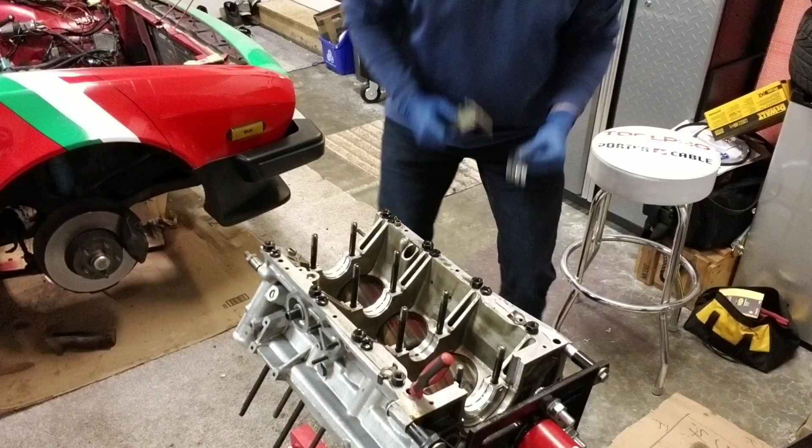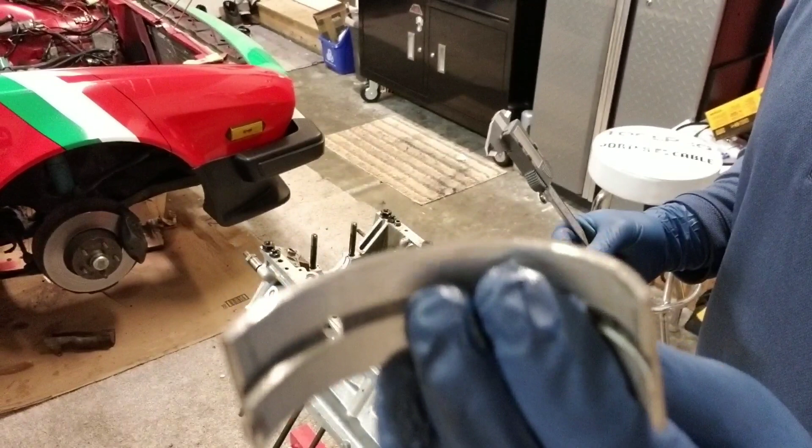So I finally received these from England today - my new main bearings, and I also got the new crank bearings. Tonight we're just going to drop the crank in, torque it down, and check it.

Here's the old bearing, and this is the new one. The way you can tell which bearings you need is by looking at your crankshaft - you'll have either red paint or blue paint on it. Mine is red, which means it was standard bearings, not undersized or oversized. They fell within a specific measurement when the factory put the engine together, so standard bearings are what I ordered.

What you want to do when you get your new bearings is get yourself a micrometer, digital or analog, and measure your old bearing against the new bearing. They should be within a couple thou of one another. These check out - I've checked all 8 of the main crankshaft bearings and they all check out, all within spec. So now I'm going to show you how to swap these out, drop in your crankshaft, and check everything.

So now we're going to bring over the crankshaft and drop it in. I'm looking at the camera and I'm out of focus - why is it out of focus? Come on, you can do it. There you go, all right.

Okay, let's bring the crank over and drop it in. You want to make sure, because this thing weighs about 45 to 50 pounds, when you drop it in, line up your bearings and journals and go straight down - try not to ricochet it and bounce it around off of everything.

And the back one will be the most tricky because that's where your thrust washers are. It should all just drop in like that. So once you're sure this is nice and seated...

If all is well and right in the world, this should easily spin. So just grab a hold of the front and give it a spin. Look at that, that's a good sign. I don't feel any hang-ups, I don't feel it dragging, I don't feel anything that feels like it's scratching or dragging. So that's a good sign. You can look down, look at the crank, look at how the oil's distributing, make sure it's distributing evenly. So that is our first good sign.

So that's great, the crank is now back in the engine. So what you're going to want to do now is install those caps on your mains.

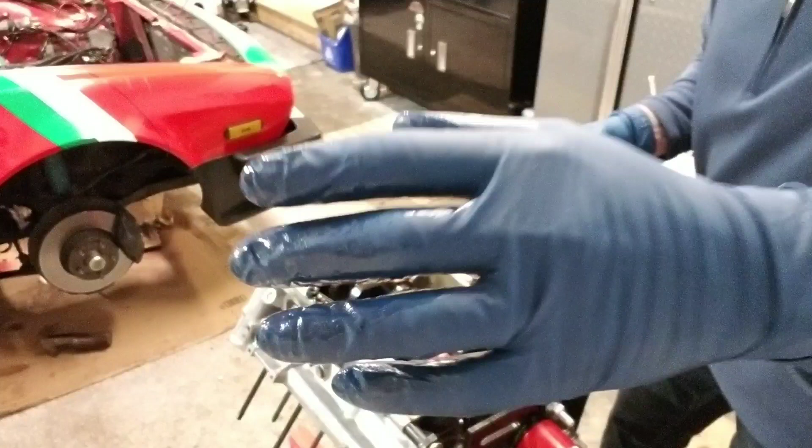There we go. But for the sake of this right now, all we're going to do is install the caps and torque them down, because all we're checking for is to make sure the crank moves freely. It's not hung up, it's not pinching. Make sure the bearings are not oversized, because if anything's going to go wrong, you want to find out before you put the engine all back together. So let's put these bearings in and drop these caps into place.

So I'm going to bring these guys over, and these as well. So here's all the new bearings, 4 on the bottom, 4 on top. And it does not matter when they're brand new what is front and what goes in the rear.

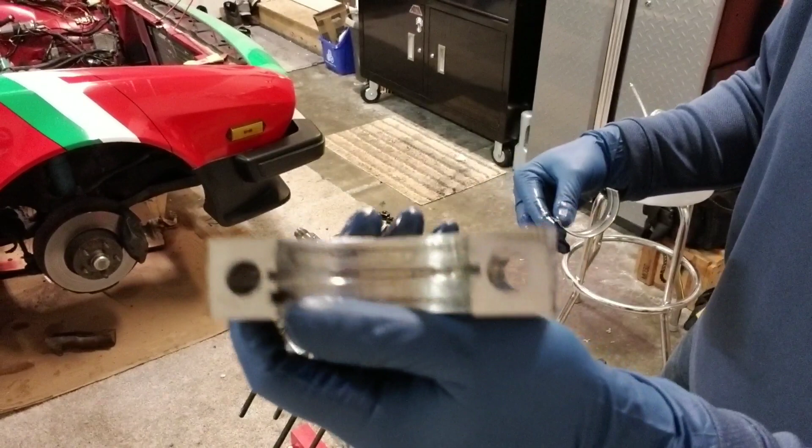So, again, just oil the surface here, spread that around a little bit, do the same, and again it's the same thing. So just like down on the block, on the crank, or on these main caps, you've got this notch that meets up with this notch right there. So all you want to do, and this is just the same as on the block as it is on the cap here, you're just going to line that up like that, and then just press, and that's it. That's all there is to that.

It is crazy simple. So then all you want to do is a little bit of oil. It could be a lot, it could be a little, doesn't really matter. You don't want to go crazy, of course, but then going to drop this into place. So this is the forward cap, we're going to drop that on, okay? And just repeat from back to front, front to back, it doesn't really matter. And again, just line up the little notch and press down into place. And that is all there is to that.

Same thing, lightly, just a light coating of oil. Or if you don't want to do it on the bearing itself, you could do it down here on the actual crankshaft journal itself. So we'll drop this one into place. And you want to make sure they fully seat down. There's a little groove that they sit down in and they'll fully seat. You just want to make sure that happens so you don't torque them down crooked and cause yourself any kind of problems, because that would just be all bad.

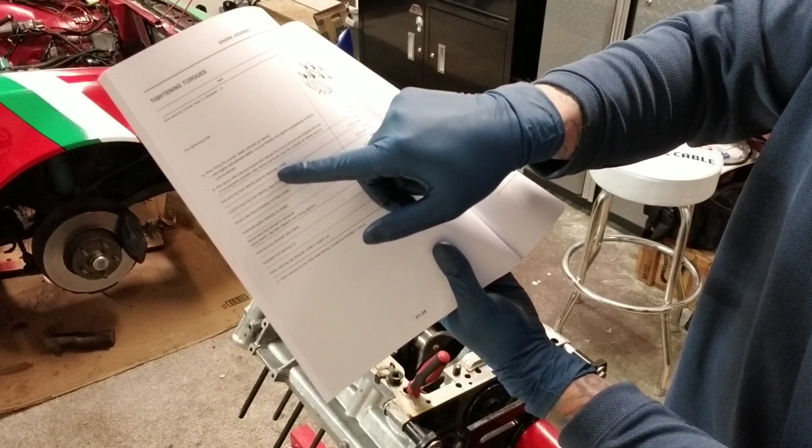So we are going to torque these down. We've got our handy dandy Alfa Romeo workshop manual, doing our nuts securing the main bearing caps to the crankcase. These are oiled, which we've already done. So we've got units of measure - Newton meters, kilograms, and foot-pounds.

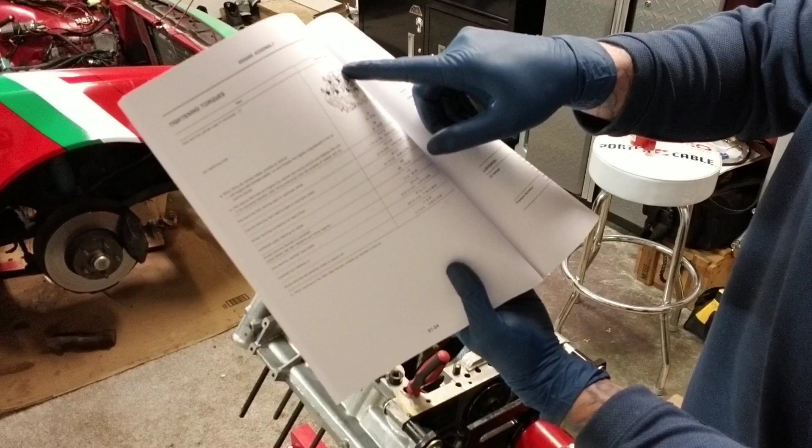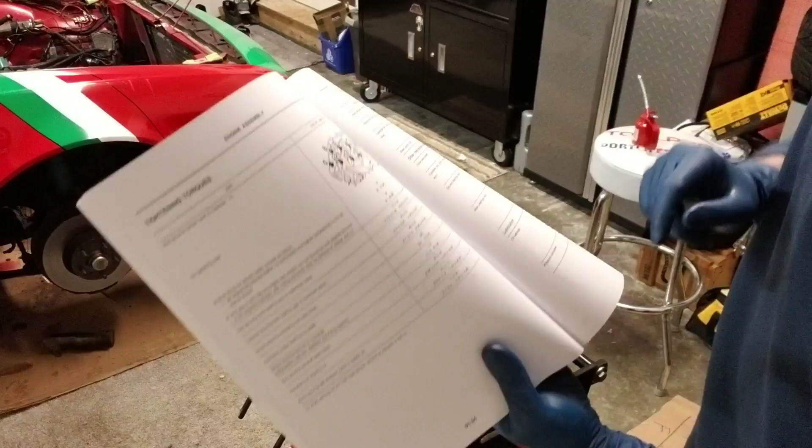Of course, foot-pounds makes the most sense to me because I'm American. So we are going to go between 56.5 and 57.5 foot-pounds. That's what we'll be aiming for, so we'll split the difference and call it 57 foot-pounds. That's what we'll shoot for. 57 is the number, so let's quickly get these down.

If I was better prepared I would have had all this set up for you guys, but I decided to turn the camera on at the last minute to make this video. If I remember correctly, these are 19 millimeter, if memory serves me. And it looks like I'm right - 19 millimeter is what we've got.

So we're just going to install these quickly with my impact. I'm not going to torque them down with this - it's just to get the nuts bottomed out. You're going to drop your washer on, then start your nut by fingering it on. We're just going to do that all the way around, get them started.

Now, it's a good idea to oil these nuts and washers. I did not wipe the oil off these when I took this apart - I just left them oiled, sitting in a little container. If you do happen to rinse off the oil, just re-oil them. If you have a spare coffee can or a little Tupperware container, steal one from the kitchen, and just soak them in some oil.

So now, before I do my final torquing, I'm going to give the crank another spin. Look at that - we're still good. Let me get this camera to focus. Come on, you can do it. Okay, so look at that, still good to go.

So now we're going to do our final torque setting. We're going to crank all of these down to the factory torque. And then hopefully, if we've done everything correctly up to this point, it'll still spin. So we're going to go.

There we go, there's the first one. There's the second one. Just keep going and go back every now and then to re-verify you're still on your torque setting. I don't know why I have to keep doing this - usually this will stay focused a lot better, but that's okay. You get the gist of what I'm doing.

Okay, run to this guy. Good, good, we'll go over here. Cool, come up to this front one. Okay, now we'll go back to this back one. Okay, and the last one up here.

And that's it. You just want to kind of look around, inspect, check everything you can. And listen - you want to listen, see if you can hear the sound of any kind of metal on metal, any kind of dragging. It'll stand out, you just use your ears, be quiet. Listen, feel. Go both directions.

Beautiful, beautiful, beautiful. Could not have had that go any smoother. So at this point too, give the crank a little bit of a push forward and backward, because you do not want to have too much - actually you don't want to have any forward and backward movement.

But this is purely just to make sure that, number one, my measurements were correct when I took my mic and checked these. And you can see a little bit here - there's some red paint there, there's some red paint there, red paint there. And what that indicates, now that I have my manual out, let me grab my rag. There it is, and I'll show you what I was talking about when I was talking about red and blue paint.

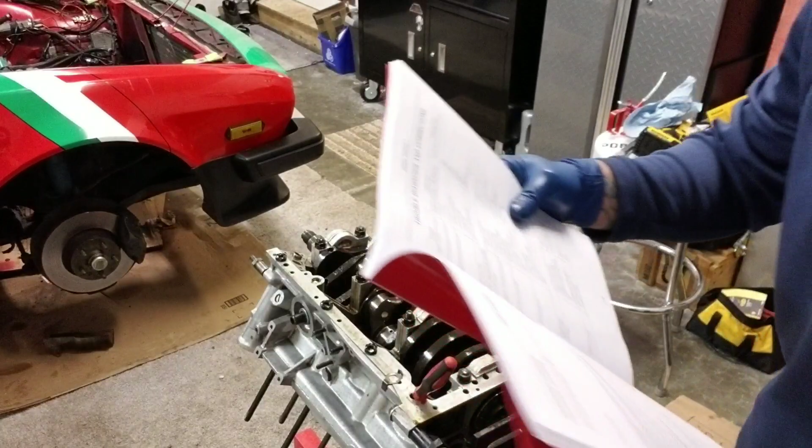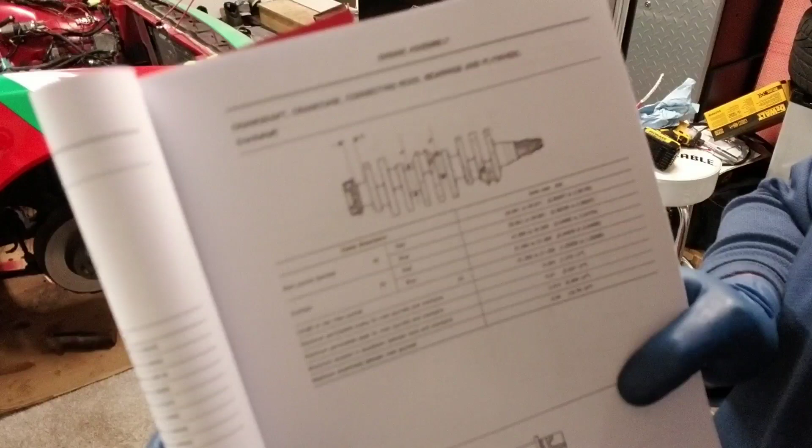So if you come into the book, let's see if I can find that page. Here we go, so you have engine assembly. Let me find the camshaft or the crankshaft, because that's what we're working on. Here we go, so here's your crankshaft. Let me get in good and close. Okay, so here's your crankshaft, rear, front.

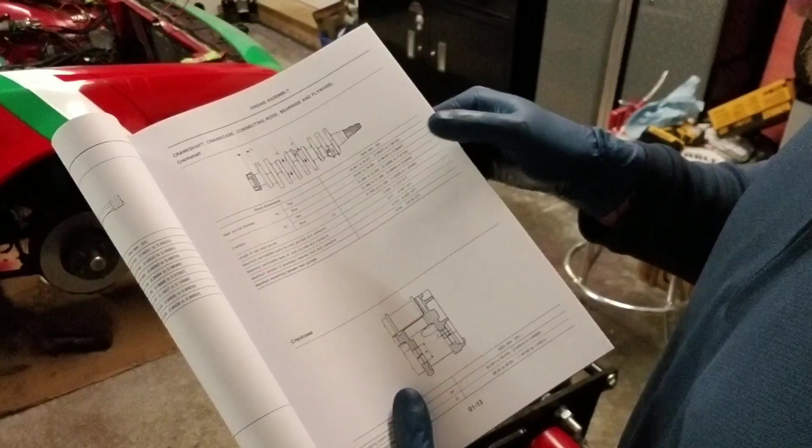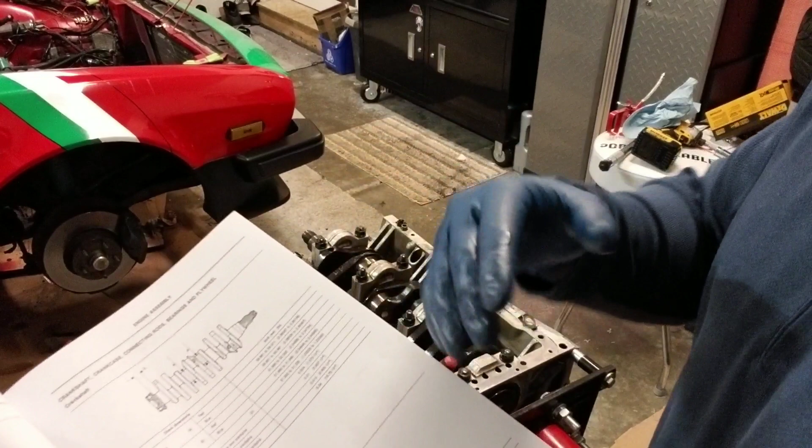So you have your main journal diameter, which is measurement A, your main journal diameter. Then you have measurement B. So they're talking here about red and blue - your crank will have either red paint or blue paint from the factory. Red paint indicating the certain measurements of these bearings, which will then indicate which bearings you will need when you do this job, if you decide to do this job. Hopefully over the 30 or 35 years, the paint has not been worn away or washed off because of all the oil. In this case, mine has not, so I'm guessing you'll probably be lucky and it'll be there as well. So you just want to look for either red or blue paint.

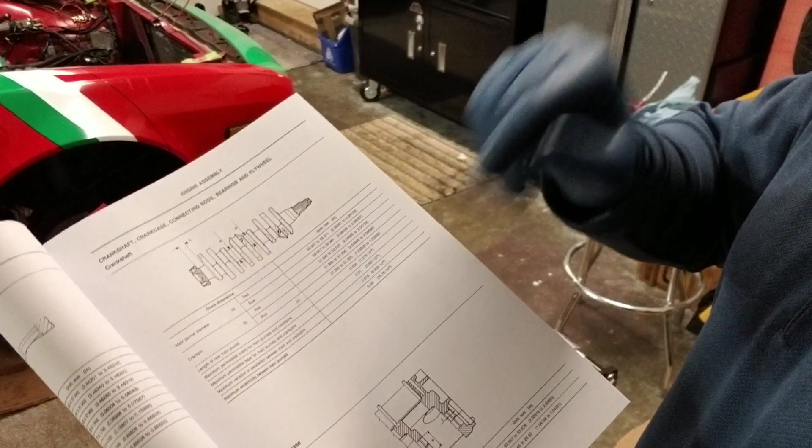And that will indicate to you which crank bearings you're going to need, as well as what connecting rod bearings you'll need. In this case, red indicates standard bearings. Now, when you go to order, just because I've gone through this, indicate whether you have red or blue paint.

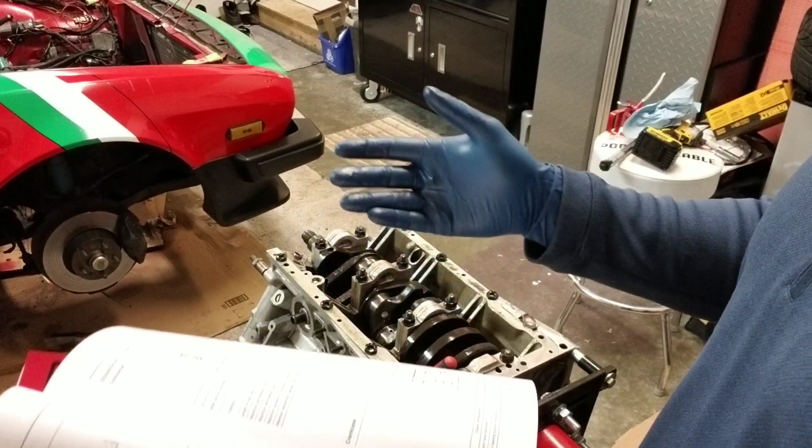Now, I'll tell you right now, I checked around in the United States. Nobody currently has both sets of both the connecting rod and the crankshaft bearings in stock together. I actually had to get these out of England. So the cost is the cost, it is what it is. You have to pay a little extra for shipping, but the cost of the parts themselves are pretty similar in pricing, whether you're paying in American dollars or pounds.

So when you are going to do this, indicate red or blue, and that'll just indicate which bearing sets you need. Now, when I say bearing sets, you're going to talk about standard, then you're going to have 0.010 over or 0.020 over. That would indicate an engine that's had some work done, or the factory machined it a little bit more than the other. But a lot of the times that would indicate, in most cases, that engine has been rebuilt at some point, and the bearings have to be oversized because they've taken some material off these crankshaft bearings.

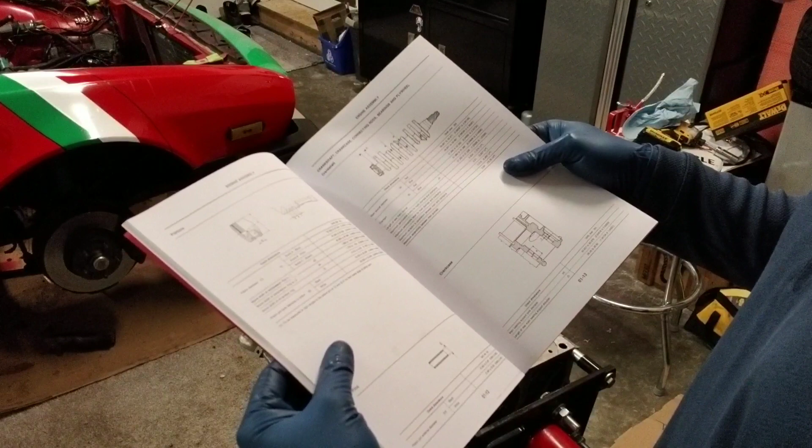But in this case, I had red on my crank, which indicated that I had standard. But you want to double check, because just because it says I have standard bearings doesn't mean that this engine at some point wasn't taken out, somebody gone through it and put in different bearings. In this case, everything checked out. So that's why it's important, before you start installing all that, is to mic it all out. Make sure the measurements are pretty dang close to each other, within a couple thousandths of an inch. And that'll tell you right away that you're good to go.

So there you go. So now we've checked this out. We've installed the crank, we've torqued down the main caps, we've checked it all. Now you could go a step further with this, and a lot of people would recommend it. I would recommend it as well.

And I might even go this far, because I am going to pull the caps off anyway, is get some Plastigauge. If you don't know what Plastigauge is, it kind of looks like a piece of plastic horsehair. You lay it down across the bearing, put your cap on, torque it down to factory spec, and then it'll kind of mush out. Then you remove the cap again, and on the little package, it'll have measurements. You can measure the thickness of the squished Plastigauge, and that'll tell you how many thousandths of an inch clearance you're going to have between the bearing and the surface of the crankshaft or the connecting rod, whatever it may be.